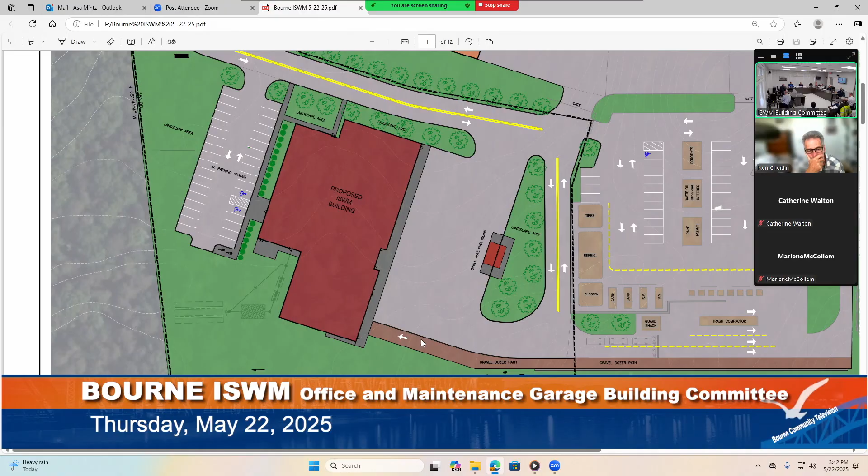Seems a little bit tighter on the south side, less underground stuff running around, you're right up next to the building. That's fine, there's nobody on that side. That would make more sense to me, as long as it's accessible so you can do your services and your tests.

A little more out of the way, I might hear it at my office. Maybe we might be a little bit. I mean, how loud are the generators? Natural gas, is it equivalent to a diesel? Or they're much quieter, right? Isn't it gonna be a diesel generator, or are you gonna go gas?

Gas, yeah. This is just standby, this isn't life safety, so it would just be gas. What, 44 kilowatt? How big are you looking? I don't know, we'll have to determine that. I assume you're gonna want a whole building, yeah.

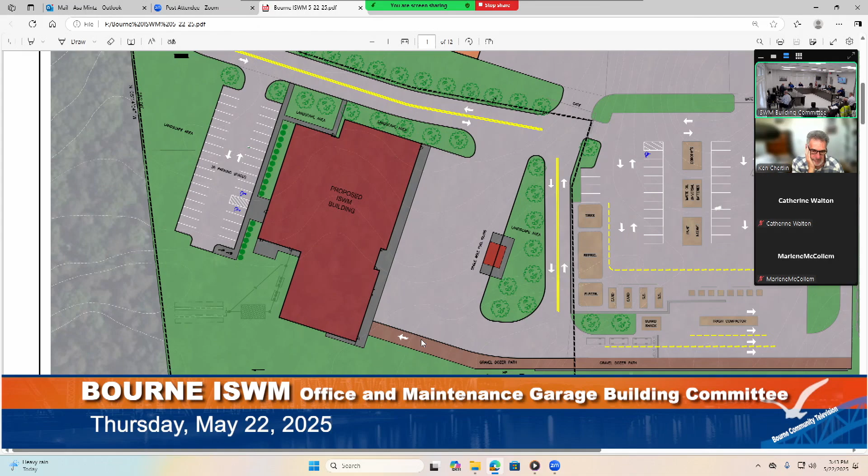Weren't we thinking it would also be connected to the power for the transfer station, the residential area too? So we're connecting all of those, we have a 300 KW at the flare, which may be bigger than what you're talking about here. But the transfer station loading is so minimal, let's see what we need for the building, and then we're kind of shooting in the dark with the transfer station since it's not even built yet.

You basically have a 7 to 3, 9 to 5 kind of operation, and I say that loosely because I'm thinking you're operating most of the time during daylight, the primary operation. So even if I were a resident taking my trash to the recycling area, the bottom line is that's basically a daytime operation. And since you're not critical operations in the sense that during inclement weather you're probably minimizing what activities happen there, I know you're still doing landfill operations, but you probably aren't worried about residents delivering their recycling, and you can control that.

You'd be surprised, ironically, in the middle of a snowstorm people wanna come. Let's not get bogged down here, but I guess what I'm trying to get at - if this were a critical facility like a DPW or a police station, then obviously you would need a full house generator up and running.

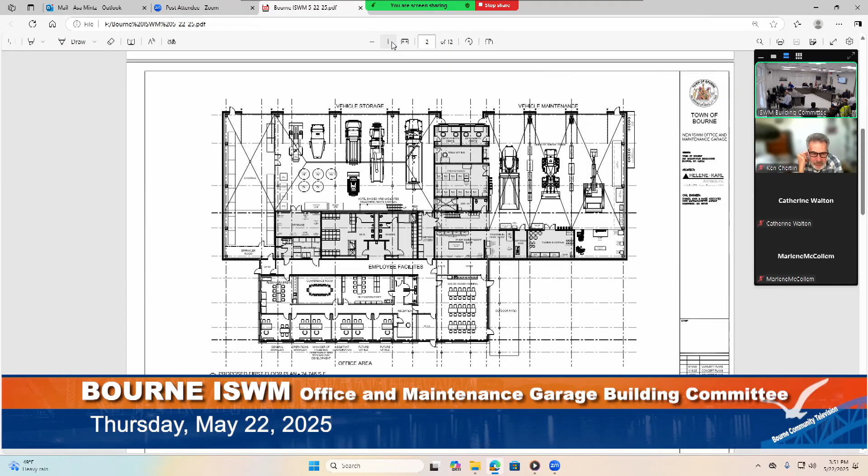All right, so this is the building plan that we discussed. Micah, I'll let you make it a little larger so everybody can see. Basically, the takeaway from the last meeting, as we saw it, was the garages were basically fine, the repair garage was fine, and the tweaks really occurred in the office area.

If you see at the far left end where we have the plan room, we were asked to expand that back to the original intent of putting the break area back in there. So you'll see we put in an 8-person table so that people can either lay down plans or have breaks there. We slid the conference room down to accommodate that. And if you may remember, there were some storage closets and the IT closet sitting between those two rooms where the work copy area is.

We are proposing, and Phil, I saw your comments on it. I withdraw all those comments, I've spoken to Jason. Just cutting to the chase, we didn't get any comments from Phil on it. He said the plan looked great.

So what we've done, and I know there was a concern with everybody, is we put the IT closet at the end of the hallway, which now makes it readily accessible. Obviously it'll be under card access and security, but it makes it very easy for if a technician or your IT group needs to come in or work. It's in a clean environment, it'll be conditioned.

Okay, that was my only question on that, was that we're going to have switches rather than racks, but still just to make sure that Chris from IT at the county is going to be in touch with you about any conditioning needs, so it doesn't get to be a humid, hot corner with the IT.

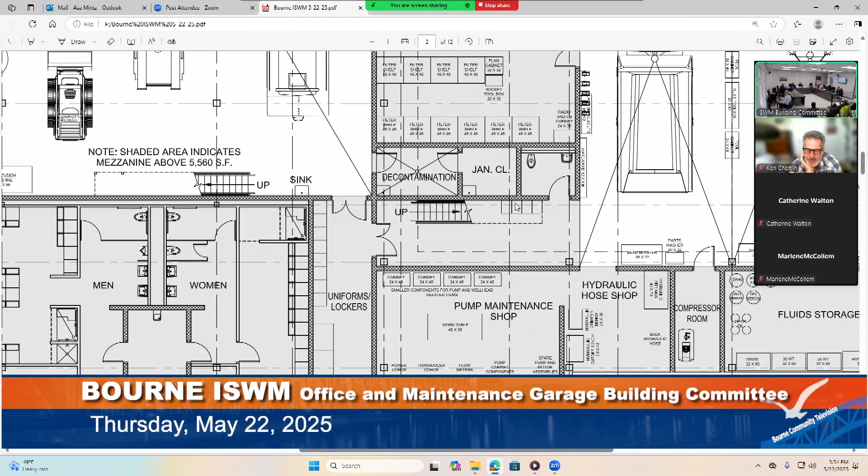We're not overly concerned about that because it's not like you're going to be having a shower there every day, and if the floor is a little wet, it's a little wet, but it's all going to drain. We also thought it would be advantageous to do that because depending on what you want to store for supplies for the decontamination room, whether it be soaps or towels, it gives you immediate access to storage right off of the janitor's closet.

That is how we address the issue of the janitor's closet, by combining those two operations. My only concern was to have a spigot low on the floor to fill a mop bucket, and then pour the dirty water from mopping the break room in the hallway, rather than lifting it up into a sink. Yes, we always put the floor-mounted sinks. So in the janitor's closet, we will have the floor-mounted mop sink, so you just tip the bucket, you don't have to pick it up.

We can have the discussion in the decontamination room whether you want a sink at normal standard height so you can wash hands, or whether you want that as a mop type bucket as well, and we can go either way with that. Obviously there will be showers, hose bibs in the decontamination room, however you want to set that up. I'm assuming it's basically going to be a hose-down area for boots and stuff, and hose, or even a whole person or piece of equipment if you needed to. So the sink in that area can either be low or high, so I can scrub my hands if I get dirty. And we'll have a heavy-duty drain, maybe with some grit.

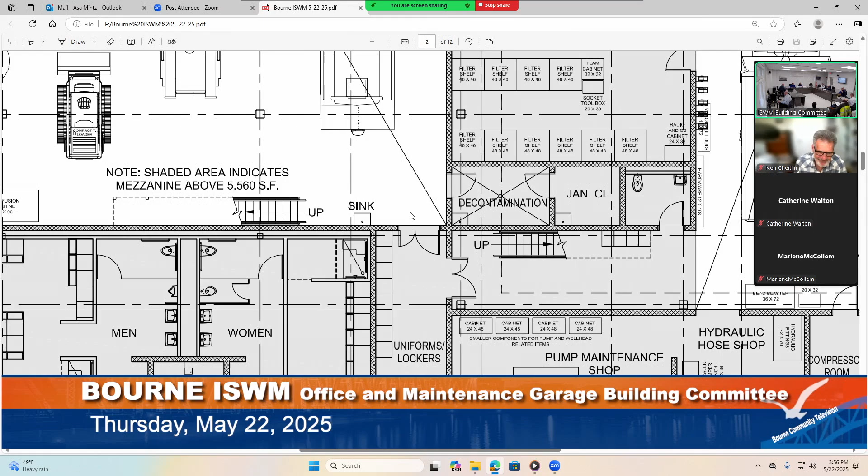I hope that includes an eye wash station, because these people run up and put a bottle in, and that's not enough. I think the eye wash is located on the mechanic side of the bay. Yes, so the idea for that sink was if I'm working on the crews, running the dozer or something, I come in covered, and I can wash my arms and stuff before I bring the dirt into the locker room or the building.

What you're talking about is, if you notice next to that truck where the cursor is moving, there's a slop sink and an emergency eye wash. That is required by code. Tempered water, the whole nine yards.

So the issue that comes up is we can put an emergency eye wash and shower in the vehicle storage, but I don't know if it makes sense or will ever be used. In the mechanics bay, we have to, so we're doing that. At the service area, it's most likely you'll get something in your eye, so that's the closest. Absolutely.

Is there a way to cover it, or just the covers that come with it? It comes with little covers that you pop off for your eyes, and then you pull a chain and it showers on you, like one of the rain shower heads. You've gotta maintain it, it's always dirty. Yeah, it's supposed to be tested once a month to keep it working. And DPW mentioned you might want a drain nearby in case testing spills over. We'll put a floor drain.

We'll make that a checklist to keep it clean and tested. You're gonna maintain your building, Phil? Yeah, well, that will be unusual. Not referring to your organization, but one of the DPWs we worked with, the guy insisted it was well-maintained. When you went out the back door, there was a little tree growing out, about a 4-inch caliber trunk. He said, oh yeah, we trim the weeds regularly. I said, I don't think so, because that 4-inch caliber doesn't happen overnight. It's not a weed, it's a tree. It's a tree, you're right, I'm sorry.

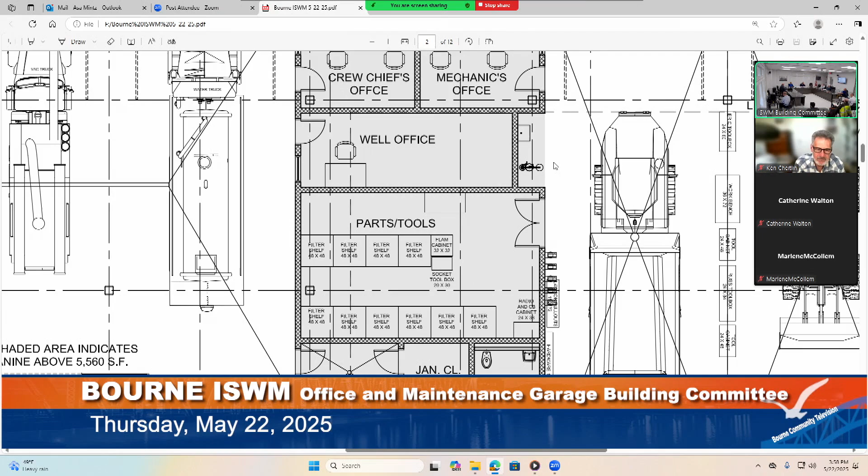It's a different union. Anybody, Nolan, any thoughts on anything? No, I think it's good. There's some extra eye wash stations, that's fine.

The heat there, are you gonna put some Modines up in the ceiling or have radiant heat in the floor? No, we talked about it, it's all gonna be radiant floor heat. Okay.

So the vehicle repair and vehicle storage areas will have radiant floor heat, so you won't have any issues with that. There will be some ventilation fans, just little 42-inch fans that circulate the air every now and then if it gets stratified.

As we all know, as soon as you open those 16 by 16 doors, you pretty much let all the heat out anyway. That's why going with radiant floor heat is advantageous, because most of the heat will be retained in the thermal mass of the slab, which will be 8 to 12 inches depending on the area. The garage side will probably be 12 inches, the vehicle storage will be about 8 inches.

They'll be insulated underneath, so you should always be able to keep the temperature in that building pretty much where you want. We target the vehicle storage around 55 degrees, and in the garage we usually go closer to 65 degrees. So those will be zoned accordingly.

The office area will have VRFs, so you'll have both heating and cooling, all electric systems, with individual cassettes in each office. So if Asa wants to turn on the air conditioning and Phil wants to turn on the heat, you both can run your system accordingly.

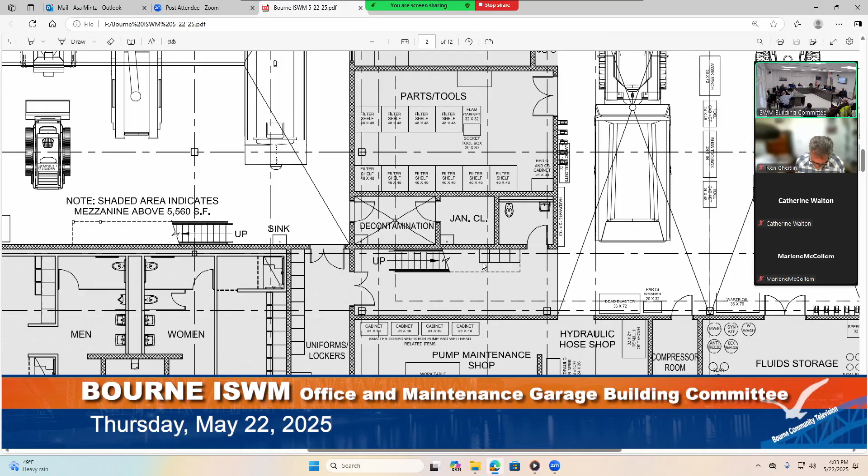Yeah, I mean it definitely looks tight, but what was that, Mike? You just have to see if you got elevation of the stair, whether or not the overhead can get the clearance. Because right now we tried to use the elevation, you see those 4 boxes at the end of the stair - those would be the lockers for the mechanics, as opposed to the platform lockers out in their space, and I think we're just getting those under there.

So we will look at it, but would it make more sense to put the janitor's closet off of the bathroom? That's what I was looking at. You mean just moving the door? Yeah, I've seen that done before. It's always, well, let us try to get it under the stair first, okay?

So you have 3 individual rooms. So the other issue, which I don't think is going to be a major problem - you'll see there's a column right across from the bathroom. The other option is to throw the lockers against that column wall, and there's still plenty of room. Mike, you want to show them what I'm talking about? Right there, you see his cursor? Yeah, so if we put the lockers right next to the column there, then we can squeeze the door in.

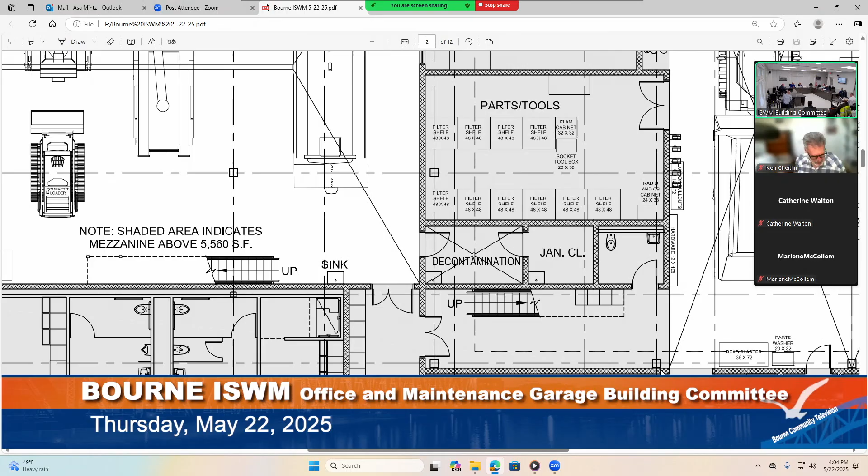We'll work something out. But I think mudroom is a better descriptor - it's not like the fire department's decontamination area in the fire station. Or just call it wash down or something like that. A day like today, you come down from the landfill, you get mud all over your boots, it's just a way to knock it down before you traipse it through the entire building. So we'll call it the mud room.

Yeah, that means you gotta make sure who's using it cleans up, because then you got someone coming to clean and they're walking through it, now they're tracking it through the building. So Greg, we're in agreement with you. So what we'll do is try to get the janitor closet door under the stair, shuffle the lockers around, and then work it that way. Yeah, it looks doable.

So are we good with calling it a mudroom? It's called a washdown, we call it a washdown room. Washdown room? Definitely, like you said, the floor bay, or whatever you call it, a grid screen or something for the heavies - gonna be a lot of dirt.

Why wouldn't that room be located close to the outside door? If they're coming in to clean themselves off from outside, why track through the whole building, or half the building, to get to that point? Well, you're probably bringing the piece of equipment in, which is just as dirty as the rest of the area. The other thing too is we've tried to keep the offices on the window space there so they can monitor what activities are happening out in the yard, trucks coming in - in the case of the mechanics bay, for example, if I'm taking a delivery because tire delivery is coming or filter delivery, we typically would put that there.

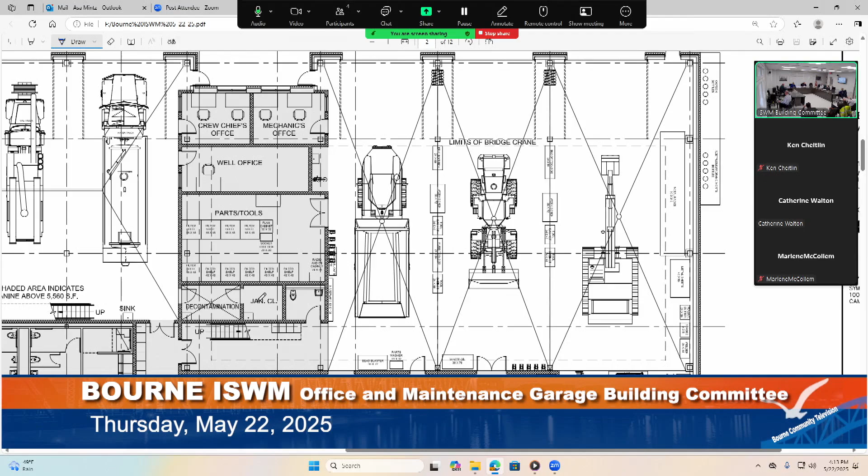So Asa, one thing I will say on our hose, because I hear and agree 100% with her, the difference is in the DPWs typically, you'll see up at the top where there's those 2 reels up against the building. Depending on the length of your hose, the DPWs usually have different sizes. Some trucks exhaust at the bottom, some on top. So all that would be is up against the wall. There'll be a rope they pull down on, they'll pull the hose over to whatever vehicle they need and flip on the switch and exhaust it that way.

So I don't know if you're going to be hitting it that much, because if you're hitting those hose reels up against the wall, you're probably hitting the building and other things too. So it's something to look at, the hoseless system, but on the other hand, I think you may not need it. And the other question is, when you're maintaining your vehicles, you probably pull them in, turn them off, do the work, pull them out. You're not idling them, not warming them, not doing anything else.

There's still the whole area exhaust system with the NO2 and CO detectors that will exhaust the space if the fumes build up too much. But in this case, it's a pretty passive system that's out of the way, so if they were hanging in the middle, I would agree 100%. But if you're hitting those hose reels, the bigger thing is you'll forget to take the hose reel off as you're backing the truck out. Not that I've ever seen that happen before, but that's probably the bigger challenge.

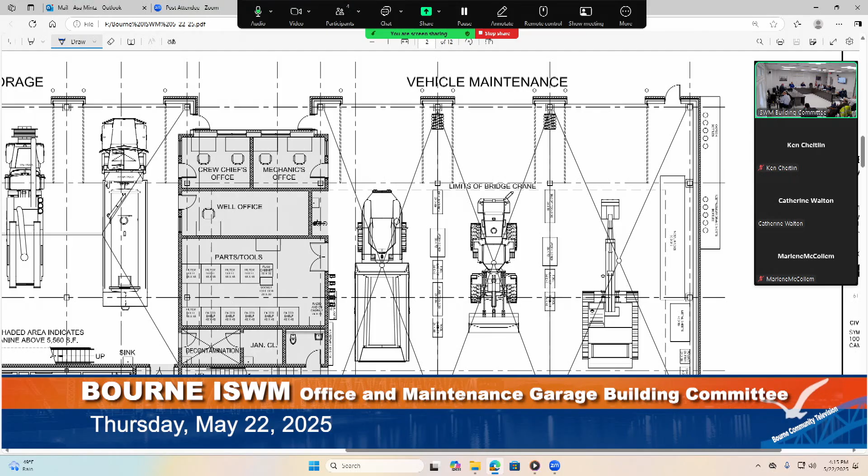I guess to that, Marlene, forward along anything you have on that, and I'd definitely take a look at it and see if it fits, but yeah, we'll take a look at it. Absolutely. Okay, thank you.

Ken or Catherine? No, I don't have anything. No, I don't have anything either. All right.

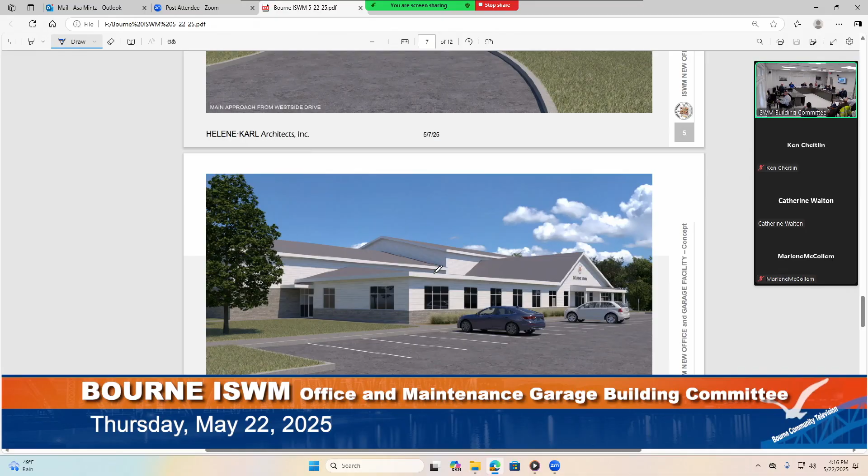So then the next item we discussed last meeting, 2 weeks ago, was the aesthetics for the building. We were asked to get what we call the Cape look. One of the big discussions we had was to eliminate the 3 dormers on the vehicle storage shed, for multiple reasons. Obviously it saves costs, makes the roof easier to construct. It was kind of a split crowd, some people liked it, some didn't. So what we did was focus in on the scheme without the dormers.

Today we brought sample material so everybody could see what finishes we could put on the exterior of the building. We can walk through that, because I think that was the main charge. We gave you the 2 weeks to review the elevations, see if you still felt comfortable with the image, and then get a sense of what kind of materials are on there.

One of the things we would be recommending on this building, because this building works a little better than if we went all metal building, and I'll explain that when talking about the roof, is that having some eaves and overhangs helps this Cape style. It softens it, so it doesn't look like you've carved a block of butter and tried to make it look like a building.

So while the main building will be all metal panels that are very efficient, we're proposing the roof be a more conventional system. What I mean is purlins go down, then the roof deck, then insulation, and then we'd put either a metal roof or a shingled roof on it, depending on what the committee decides.

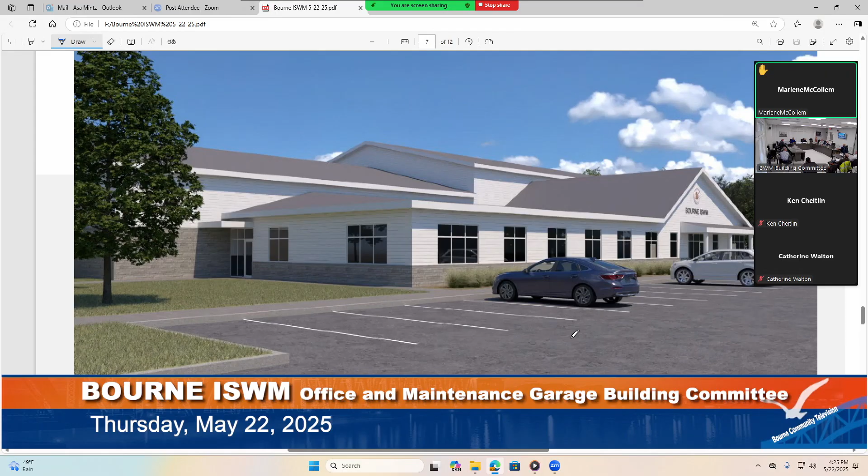Okay, and one thing I guess eventually, when the system is determined and designed, one of the things I'll want the committee to spend some time thinking about is, when it's time to put a new roof on, how do we replace the roof? Is all the conduit—nothing's up against the deck where we're screwing anything into it or anything like that?

So if you have to replace the roof at a future date—and when I say future date, 50 years from now—basically all you would do is go in and pull up the metal roof or the shingled roof, whichever system you decide. We're recommending metal, but we'll let the committee decide.

Then if for some reason the insulation was deteriorating, or got water in it, you'd rip the insulation up, with the metal deck down, screw in the new insulation and redo it just like before. So you wouldn't be ripping off the metal decking or anything else if you go with this system, as opposed to an insulated metal panel, where if you pull the metal panel off, you then see into the building. So does that answer your question?

Okay, yeah, thank you.

Are we designing this building to be a LEED level building, or are we just trying to get them? Not LEED, no.

We had talked about net zero, but not with gas. We figured we'd focus on solar on the transfer station, and then we've got acres of solar on the landfill when it's all closed. So rather than focusing on this building where we have limited space and putting solar on the roof, which didn't make sense, we put it on the other areas.

Greg, I'll let you speak to this as well, since I'm sure you've done some of the LEED buildings. If we do this as a LEED building, we're probably going to tack on a million dollars for the plaque, because there's a whole monitoring process before, during design, then during construction. For a million dollars, you could give me 900,000 and I'll save you 100,000 and make you a nice plaque for the building. I was looking at that and downloaded some stuff.

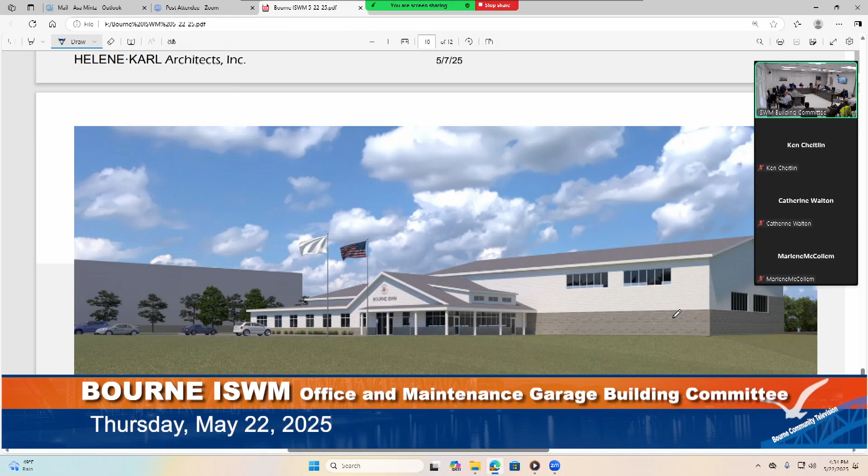Next slide, Mike, I think - and that's just kind of the final elevation. I think that's the last slide, right, Mike? Could you go back to where the crew chief's office entrance is?

Mike, I think that's like the first slide - one more, oh one more back, it was close for a few. But you see where the little enclave there is? Yes, the alcove or whatever.

I'm just thinking practicality - we have a crew chief's mechanic's truck, a pickup truck, Asa's truck, and the landfill crew's truck. So I'm wondering, when they come down from the hill to break and use the lower side, if that had a little guardrail and some spots there, they could park and come in. Is that where we tend to have the door entrance, so they would walk in to the decon? Yeah, unfortunately, they just didn't show up on this rendering.

Okay, yeah, so the 2 doors are going in on the sides there. So rather than park over by the fuel and walk across, is there space to have 2 or 3 spots there for the regular vehicles?

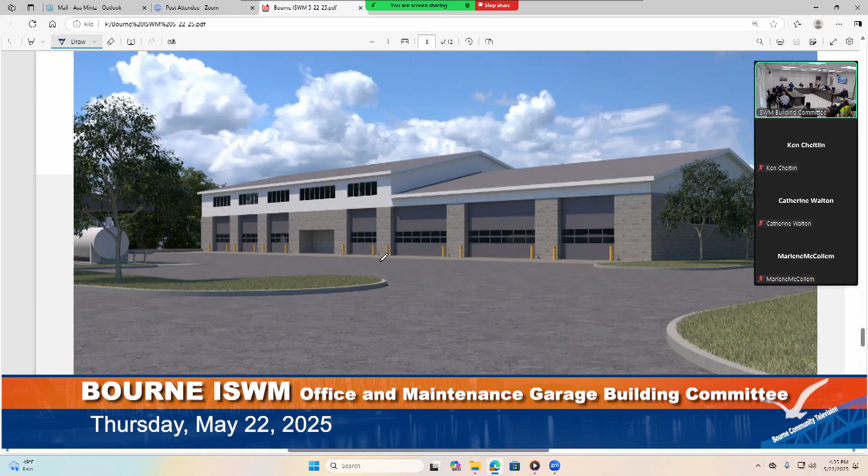So what I would suggest in this case is that we can put bollards there. And then you guys park wherever you want. Because even if I stripe the parking lot, I've known people that can't park between the lanes. What's gonna happen is the guys are gonna come down, park in front of the garage doors, go to coffee break, go to lunch, and then come back out and everybody's gonna disperse. So I don't see that being an issue there. I don't think we need to designate any parking there.

But that's what they're gonna definitely do - they're not gonna park over the fuel side mark. Yeah, for sure, absolutely. Okay, gotcha.

I like that it's a little bit recessed in underneath, keeps the snow off, not walking right out into traffic like we are right now. That's nice.

It looks nice. So, but that's what I was saying - if you would like me to, in this pad area, I can put bollards maybe 4 to 5 feet off the building, so people can still walk by, so somebody isn't parking too close, and again you guys are gonna figure it out. The nice thing is you don't have heavy volume of traffic - there's 10 or 12 of you guys working, so you know what to do and where to park, but I can do that, or we can just leave it so you can plow it easier.

I don't think bollards are necessary there, to be honest with you. I mean, you're protected by the fact that - I'm not just saying that if somebody pulls up too close. If somebody parks in that little alcove, I think we're gonna have to have a conversation with them.

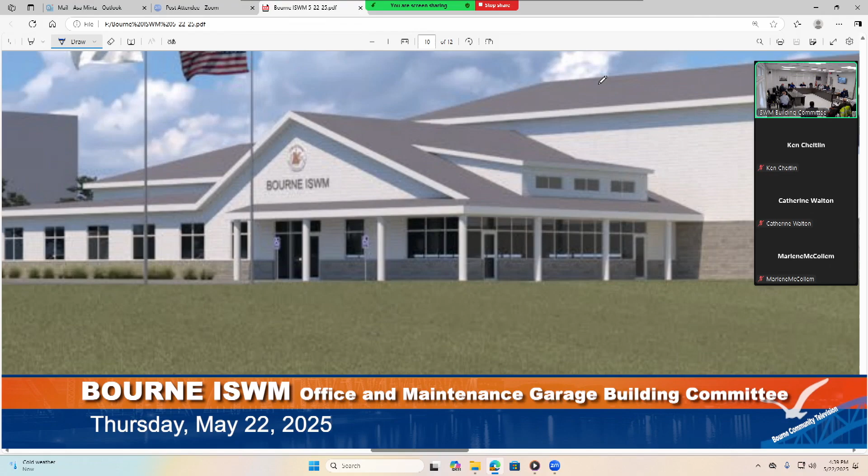Yeah, and Mike, if you go back to the site plan, I think what you'll see is, obviously, there's the area under the porch, but right in front of it, we extended the patio area out like 10 or 12 feet. I think you can see it on the site plan.

Actually, it's here. So it's this line. Yeah, okay, so you see there's a little patio right there. That's fine. What is it, one inch equals 10 feet or something?

Well, the canopy, I think, is like... the canopy is 6 feet or 5 feet, Mike? I wanna say it's 6. That's like 6 feet, and then we're coming out like another 10 to 12 feet on the area.

For the golf. We can also put the putting green in that area if you'd like to. Awesome, it looks beautiful.

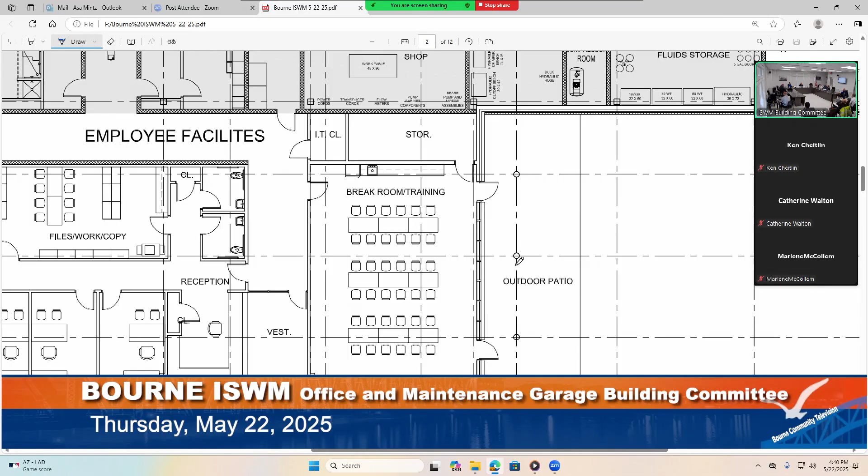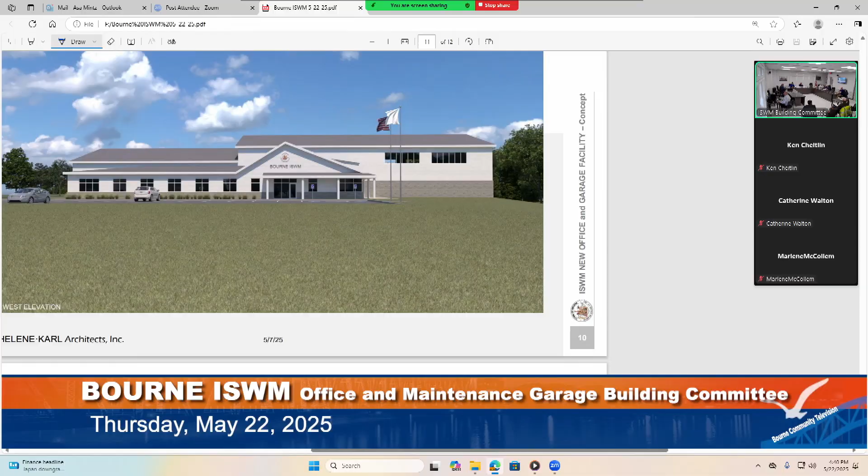All right, so are there any comments? Mike, if you could pull up that west elevation, since that's kind of the one -- so what I'm gonna do is walk us through some materials now, and everybody can do their thing.

Glass, be careful. Yeah, I know. That's what I'm worried about.

So, okay, we are proposing fiberglass windows for the building. Couple reasons for that. Greg, I don't know if you found a solution yet, but we are finding it very tough to find windows that meet the energy code. Because you either roll with a curtain wall system or you roll with fiberglass windows, because most of the metal windows these days do not meet the energy code.

I know EFCO is supposed to be coming out with them, haven't seen that yet. Are you having that problem? So it depends on what type of building we're doing.

On smaller buildings, we've been working with the HERS raters and getting it so that we don't need to deal with that. On bigger buildings, we're just gonna go into the curtain wall. So we either go curtain wall or we go with a fiberglass window.

What does curtain wall mean? Curtain wall is glass and a metal frame, but the way they assemble it, you can get higher performances on it than just the standard extruded windows.

We do know that these fiberglass windows meet the energy code because they've got the welded corners, they're filled with a foam inside, and they meet all the requirements. The other nice thing about it is they don't rot, you can get them surfaces, you can paint them any color you want. As you can see on the back side, we had a custom color.

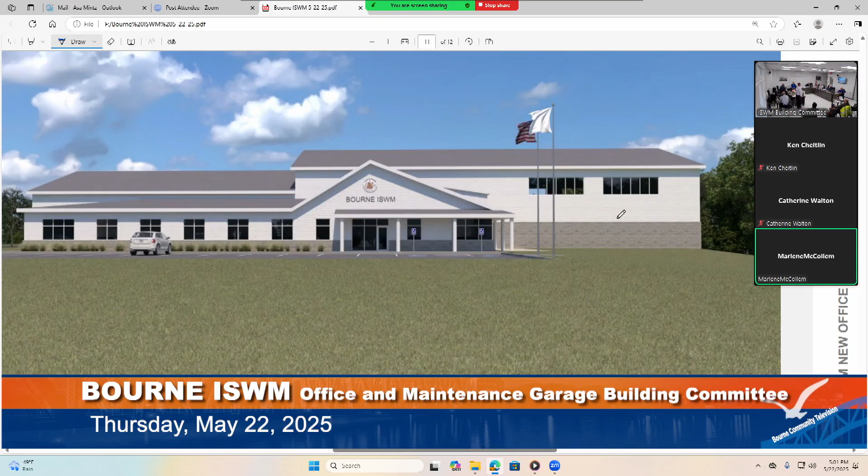Do you know what that building system was on the school? I'm not thrilled with how the police station Hardie board turned out. Most of our other buildings, frankly, are masonry. I don't know what the DPW building is - is that a metal panel? Metal panel, yeah. And what do you call it, what we have here proposed for the brick or the facial.

So, if you do a road trip up to Whitman, you will see it has the masonry base, happens to be a red brick, and then it has a panel like this that's smooth - comes with like an orange peel, smooth, slight rib, big rib, whatever. I'd say it's a handsome building, looks nice, and at this scale and where you're at, I don't think it's really gonna make a difference whether that has clapboards on it or just a white surface.

Because from that rendering, which we can see, I'm about that far away from the building, you can't really tell if you have clapboards or a smooth white building. I would agree to that. I actually think the way the building's designed now, having the smooth panel, wouldn't be a bad option at all.

Again, after looking at the DPW building, I think anybody could just drive up there and look at it - it's very similar in the scale. They've got that front area that's kind of similar to this, and then they've got the big building in the back. With the masonry and the way the windows are broken up, I don't think we need the horizontal look.

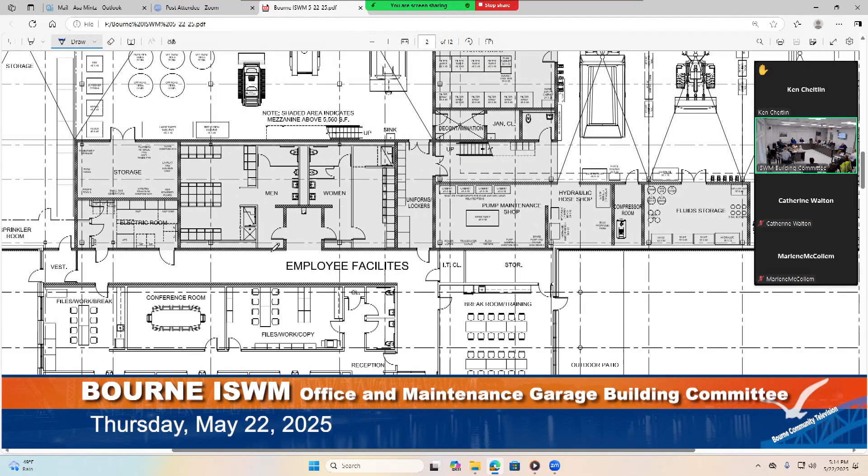The other option I'd like to know is, are we going with a metal standing seam roof or a shingled roof? Metal roof, pretty sure I speak for everybody in that. I'm just curious, is there a big cost difference between the metal and the conventional shingle? Yes, but it lasts longer, doesn't it? 50 years versus 30. Wind also rips up the shingles. I agree, metal is the way. Okay, so I think we're unanimous there, in metal roof? Yes.

Probably in the masonry too. The masonry as well? Yes, seems unanimous. Are you all basically okay with the masonry we've shown on the renderings, where between the doors to simplify the door jambs we're running it all the way to the top? We've lowered it at the office area, and on the side we tried to make a transition so it aesthetically looks nice. So that would be the goal. And again, we don't have to pick the masonry color tonight, as long as I know you're happy with the masonry, that's good. And then at the last minute if you decide you want a red brick or something, we can go with that. So is the masonry acceptable as shown? Yeah, okay.

What about the windows? Are we good with the fiberglass windows? Yeah, I'm fine with the fiberglass windows, I think it's a great choice. Okay, and Catherine? Yes, I'm fine with them also. I'm fine with them too, okay.

So it sounds like the only real big decision you have to make - and it's not going to impact me tonight if you don't get it to me, but the sooner the better - is what you want to do with the clapboard look. Do you just like the metal panel with a slight texture, like an orange peel finish with slight ribbing? Do you want to wait to see Whitman and see how that looks? Or do you want us to start considering putting some type of rain screen on it? It sounds like nobody's in love with Hardie panel.

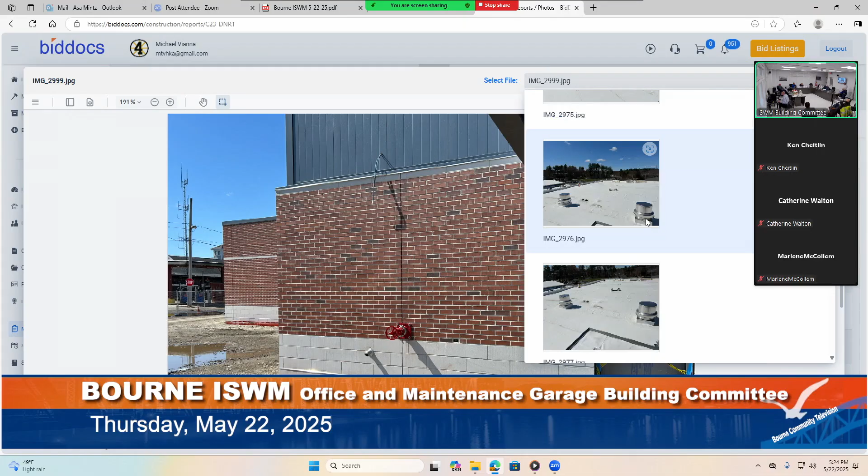This is the side of Whitman. Again, you can see the panel, you see some of the seams, you can get them in like 32, 36, 48, 42 panel sizes and stuff. And then, we don't have any front photos, do we?

But again, I don't know, from the distance in the landfill, if this were a white panel or a light gray panel, is the clapboard going to add that much? Because Greg, I kind of agree with you, the form of the building with the pitched roofs and everything kind of gives you that Cape look without literally having to put the materials on there. It's also the proportion between the windows and the masonry, there's just not a lot there anymore. Yeah, that's a good point. And there's obviously not a lot, and the masonry isn't washed or anything yet. I don't know, I don't have any other photos up there, I thought I put some up, I don't know what's happening, maybe I just, no, I believe you, Mike.

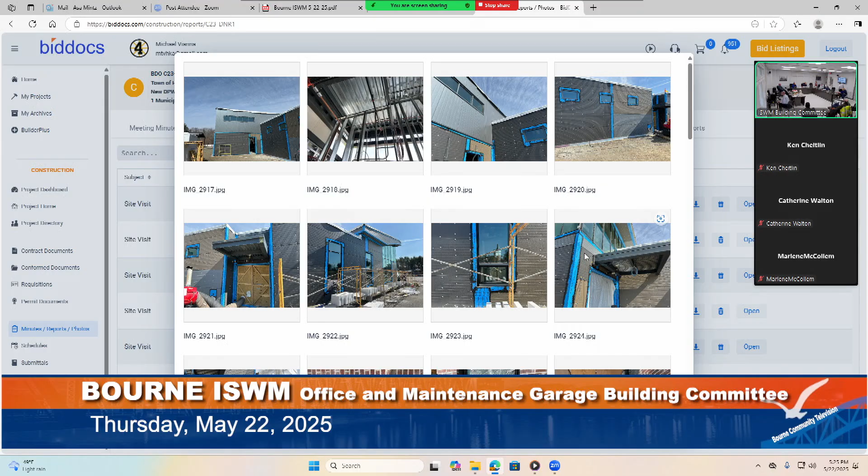I think just from a cleaning perspective alone, it's simpler. Hey Mike, why don't you just pull up one of these photos, like a 922 with the liner panel showing, yeah, that's great, okay.

So this is what happens on the building, this is all getting masonry, so this is what we call the liner panels. As you can see, it's just the standard insulated metal panel, screwed in and everything, and then this is where all the brick goes over it. So that's how we keep the building envelope very tight and very energy efficient. The whole building will be lined with these metal panels. You just don't see them because they're either covered with brick, or if you just choose to do clapboards.

Brick? Yeah, that's all brick. But we were looking at metal panels or clapboard. What I'm trying to say is the metal panels go all the way behind the brick. Then the finished metal panel sits on top of it, and that's why you have that little seal, because you take up that airspace and the brick dimension.

And that connection between the masonry - is it metal all the way to the floor? Yep, to the bottom. And then the masonry's on top? Yes. And then that seam on the sill, the bottom sill, by the dirt - that's what I was mentioning earlier, about the vermin getting in.

So what we do is put weep holes in there. So it's a solid brick wall, and the mice have to climb through the mesh in a mortar joint. The bottom two courses are grouted solid and flashed, with a counter flash maybe.

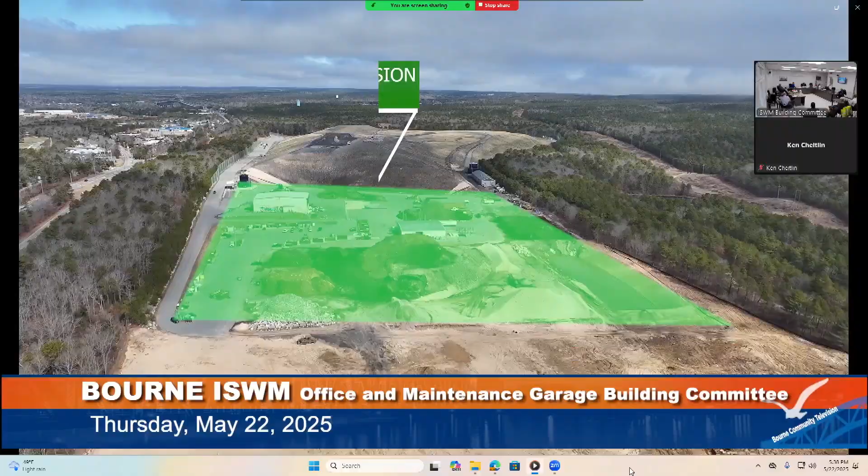This is amazing. At the Department of Integrated Solid Waste Management, a new chapter begins as the facility expands and continues to serve the local community, region, and environment with decades of disposal, recycling, and reuse options. The Integrated Solid Waste Management Facility and landfill recently went through an extensive permitting process, resulting in the town's ability to develop and utilize the entire site footprint, which will extend the life of the landfill 15 to 20 years. As a result of the permitting expansion, the final boundaries of the operation have been established, allowing the staff to maximize landfill capacity and place permanent structures in areas that cannot be utilized for waste disposal. This expansion requires facility infrastructure to be moved and rebuilt in areas outside of the landfill footprint on the lot directly south of the residential area. Construction of a new office and maintenance garage, an updated transfer station, and an updated residential recycling center will be required to accommodate the expansion.

This project will begin with construction of the new office and maintenance garage first. Site preparation, engineering, and architectural design is already underway with proposed major construction beginning in early 2026, pending a town meeting vote. The new office will provide the needed space for administrative staff functions, while the garage will provide updated, safe, and useful space and equipment needed to support and maintain ongoing operations and provide much-needed storage. The ISWM Building Committee, with the help of ISWM staff, Helene Karl Architects and Construction Monitoring Services have been tasked with overseeing this building's function, design, and construction. The building is proposed to have a useful life of 50 years, providing useful town infrastructure far past the life of the landfill. And as ISWM is an enterprise fund, this project will be funded entirely through revenue generated by facility operations. More information can be found at the ISWM Department and ISWM Building Committee website, or by reaching out to the ISWM staff.